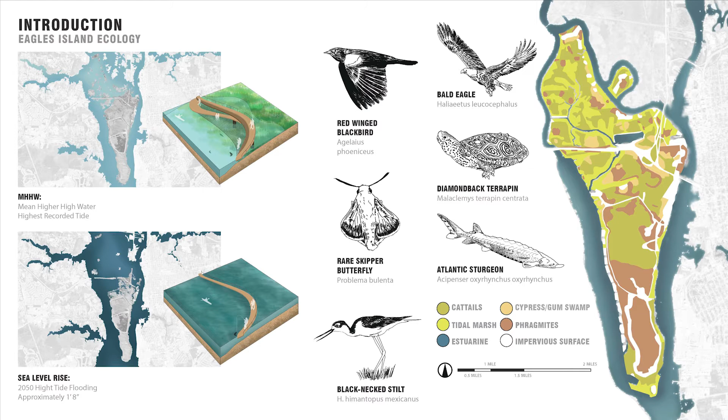Another part of our research looked at how to design for flooding and sea level rise. Because Eagles Island is home to a biodiverse flora and fauna, it serves as a wildlife haven and must be designed sensitively. Our concept for the design is connection as placemaking.

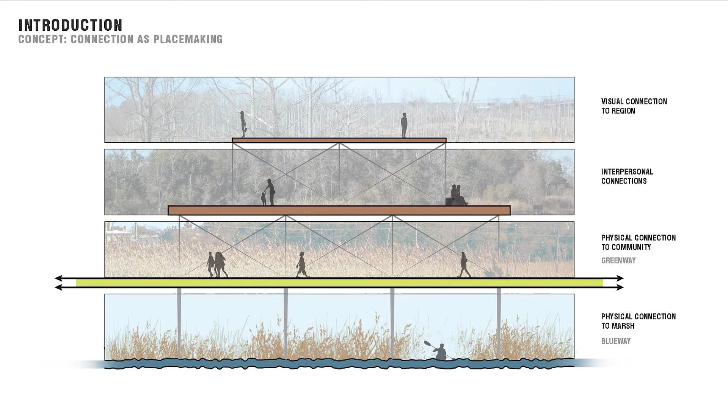By connecting communities and individuals to the natural world and to each other, Eagles Island becomes a place of recreation and education while promoting nature conservation. The design uses pedestrian bridges and blueway trails to directly connect to the surrounding communities.

Based on our analysis of sea level rise, we concentrated programming on the east side of the park. This Edge Park will integrate into the Battleship Park plan. In Edge Park, the Brew Garden connects to the social life of downtown Wilmington via pedestrian bridge.

Visitors to Eagles Island can explore the rest of the park on the bicycle and pedestrian trails or with a kayak on the Blueway loops.

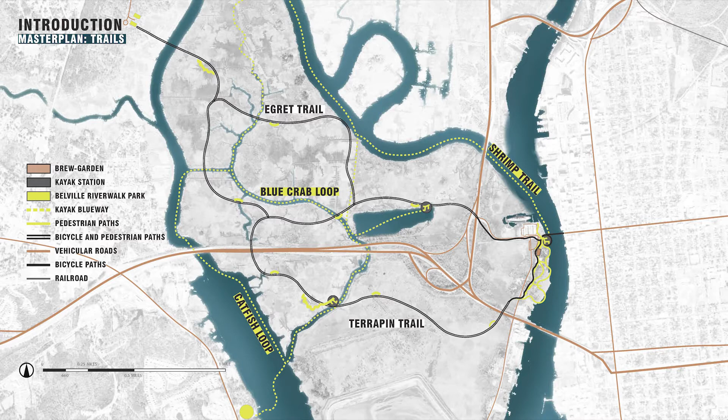The park will be built in phases, starting with the core elements of Edge Park and the major Blueway and Greenway trails, then moving to the second phase, which adds a connection to Belville's Riverwalk Park. The final phase will connect with the proposed Gullah Geechee Heritage Center.

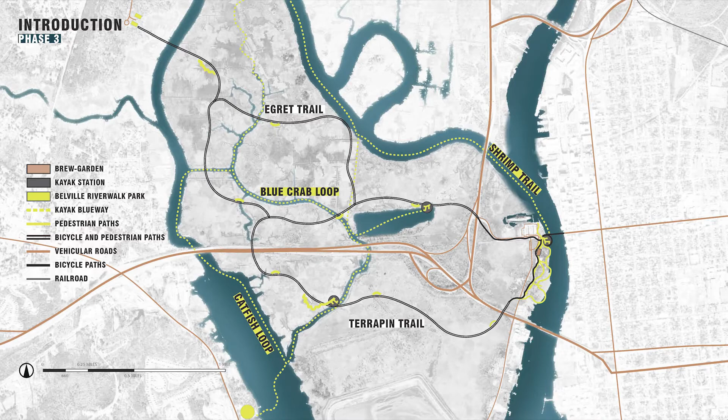First, let's look at the boardwalk and wayfinding design. Because Eagles Island is a marsh, it is most accessible by boardwalk. The design of egret and terrapin trails account for both cyclists and pedestrians, so all can enjoy the island.

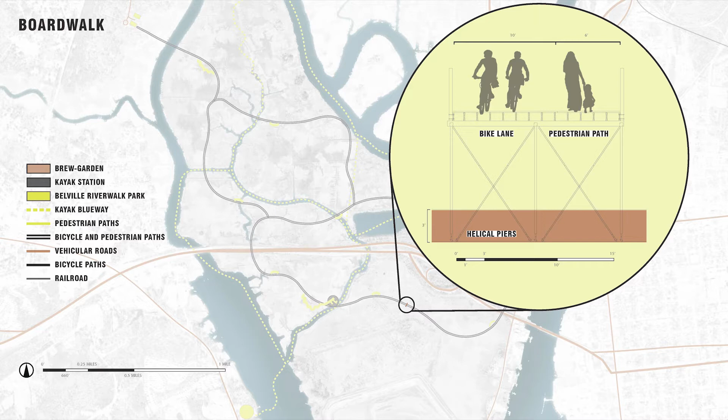The helical piers that support the boardwalk minimize ecological disturbance. Along the 7 miles of trails to walk or bike, there are areas throughout to rest and enjoy Eagles Island. Each marsh overlook has space to park your bike and a repair station if you happen to get a flat.

The pedestrian path pulls a little away from the bike path and slightly lowers into the marsh with ADA accessible ramps. A spacious seating area offers a good place to eat your lunch and watch the birds. Walking closer to the edge, educational signs will teach you about the wildlife that you are seeing.

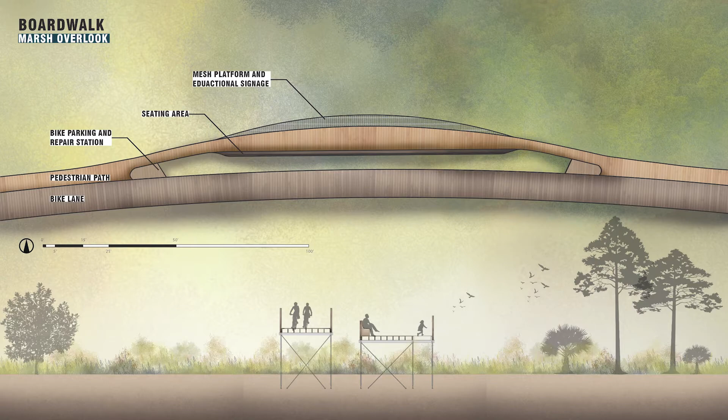At the edge, the wooden boardwalk changes to a mesh, providing a closer connection to the plants and animals of Eagles Island. The physical separation from the main path shows users that this is a place to slow down and soak in the natural beauty of Eagles Island.

While the marsh overlooks show visitors a vista of Eagles Island, there are some areas along the boardwalk that deserve an even closer look to understand their significance.

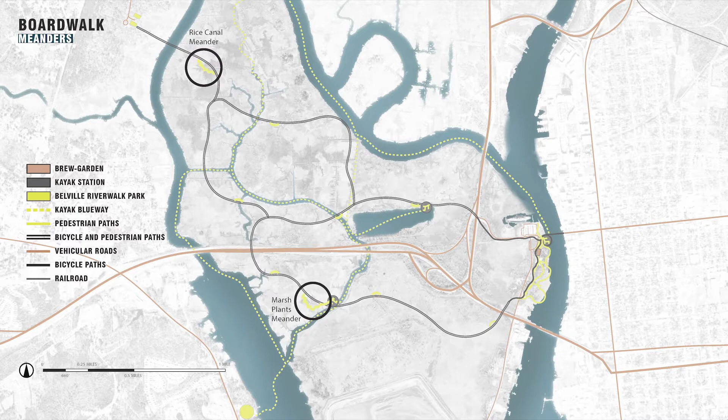These meandering walks are located on the western side of the island to connect with the residents of Belville and Navassa. The marsh plants meander is connected to a kayak station, and the Rice Canal meander is only a short walk from the Gullah Geechee Heritage Center.

These marsh meanders fully break away from the main paths. The winding path guides you to connect with your surroundings and learn about the history of Eagles Island.

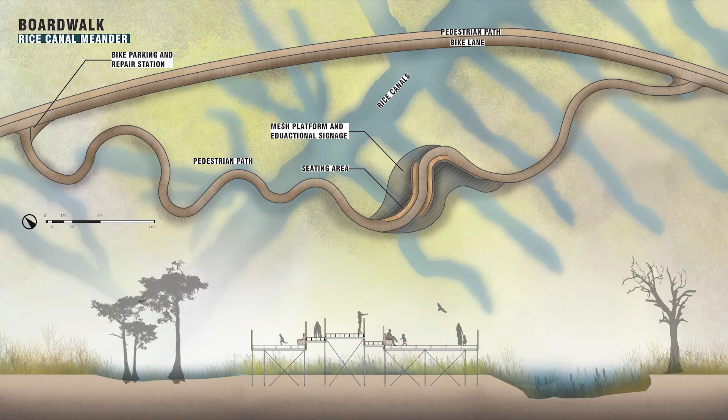The Rice Canal meander allows you to stroll over old canals. These were once used by enslaved Gullah Geechee people to grow rice. The canals that crisscross Eagles Island serve as a visible history of that time.

The marsh plants meander is further south and lets you walk and learn about the ecology of Eagles Island and how humans have impacted it.

This area details the habitats present on Eagles Island, from the cypress gum swamp, tidal freshwater marsh, and stands of cattails. But it also includes information on invasive phragmite stands and the areas of dredge spoil.

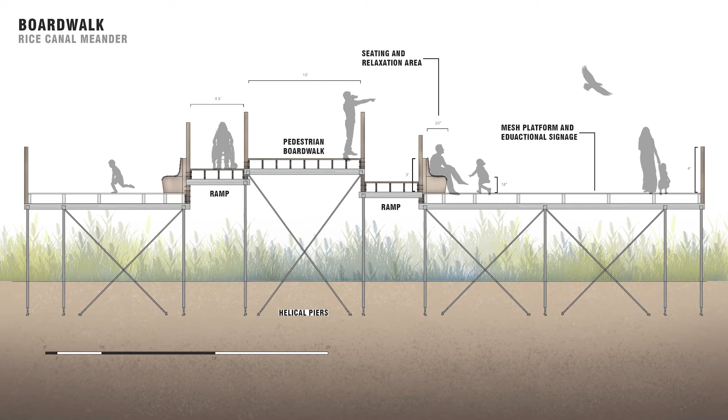The entire southern portion of the island consists of material that was dredged from the surrounding waterways to make the rivers navigable for large vessels.

To help visitors navigate the site, I designed a system of signage standards for wayfinding. Because the focus of the park is connecting people to Eagles Island, the signs share a consistent form that is distinct from the signs in the surrounding communities.

This will help visitors know that they are on Eagles Island. The materials of wood and Corten steel speak to the historical and current industry of the area, and also fit with the materials used for the bridge, brew garden, and kayak stations.

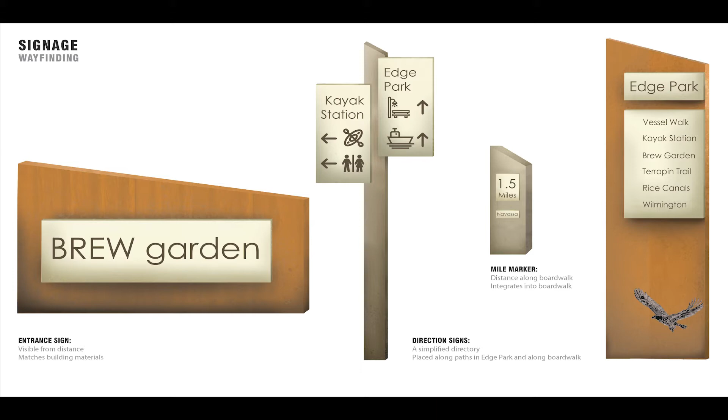These wayfinding signs are repeated at different scales across Eagles Island Nature Park. The trail maps and mile markers also help orient visitors on Terrapin and Egret trails, and the warning signs and trail markers help ensure that Blueway Trail users stay safe.

The signage also serves to connect community members to Eagles Island through education and citizen science outreach. Visitors can use their phone to access apps like iNaturalist and eBird to record observations. Visitors can also help record how the shoreline changes and provide valuable insight to the local scientific community.

The signage system sets Eagles Island Park up for success, since visitors will easily understand how to navigate the park and connect with the history and ecology of the site, while they connect with each other and with the local community.

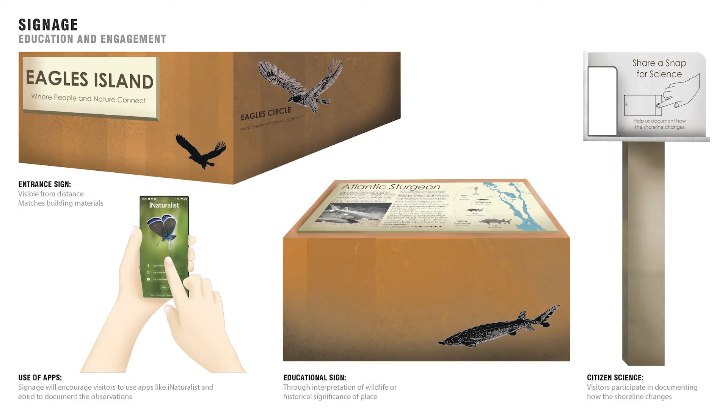So now moving from the larger master plan and wayfinding to Edge Park, where visitors can discover local treasures while being immersed in the natural environment, with a goal to explore, connect, and restore.

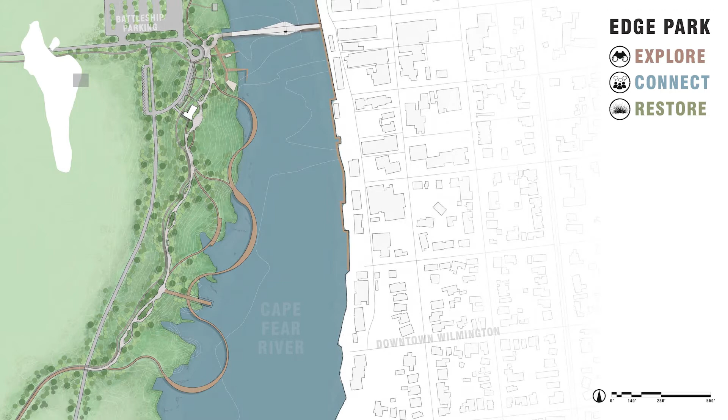My site analysis revealed the lack of public parks and green spaces in downtown Wilmington. There's a need for an engaging green space, and the best location is across from Wilmington's Riverwalk and adjacent to the frequently visited Battleship. Edge Park would nearly double the amount of public green space in downtown Wilmington.

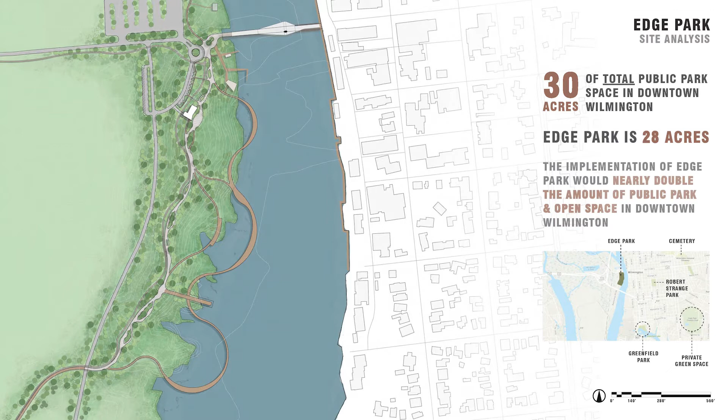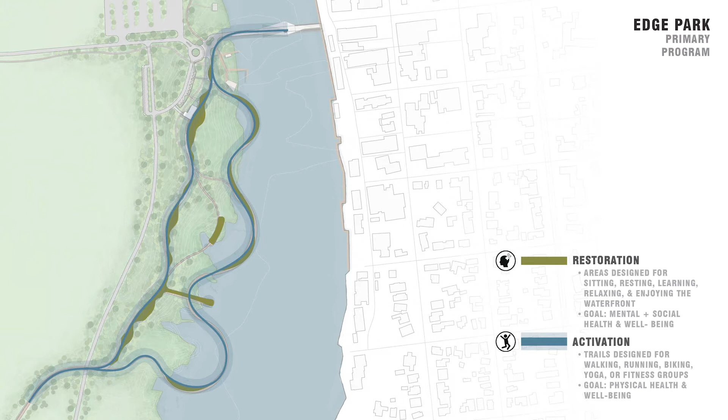Edge Park's primary program consists of restoration, or places to rest, learn, and relax, with a goal of improved mental and social health and well-being, and also activation, with areas for walking, running, biking, or yoga, aiming to improve health and well-being.

There are three primary elements of Edge Park: the Vessel Walk, highlighting living shoreline and education, Upper Path, designed for socialization and recreation, and View Platforms, highlighting visual connections and restoration.

Active and restorative programs are scattered throughout the park, with supporting facilities such as seating, lighting, shade structures, restrooms, and parking. There are many activities and unique elements to discover, like exploring the sunken vessel and wharf remains via kayak.

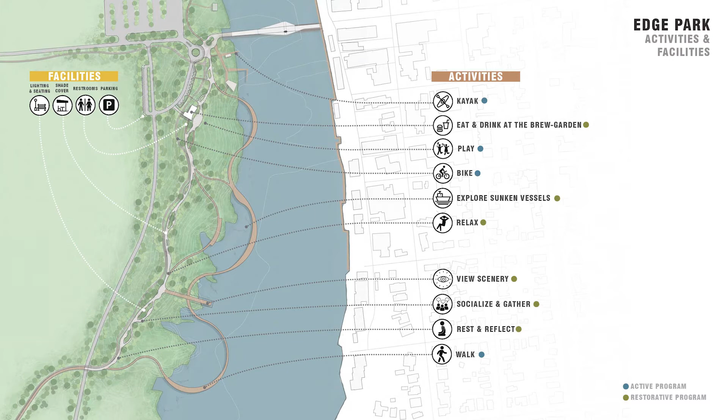Or walking along the curvy Vessel Walk designed for users to view vessels from all angles. There are areas to gather and relax with views overlooking the Cape Fear River. A pedestrian bridge connection from Wilmington's Riverwalk offers an easy access to Edge Park.

The 14-foot wide Upper Path is designed for low travel speeds. The 9-foot wide Boardwalk or Vessel Walk is for pedestrians, and the 8-foot wide Bike Path is for higher travel speeds.

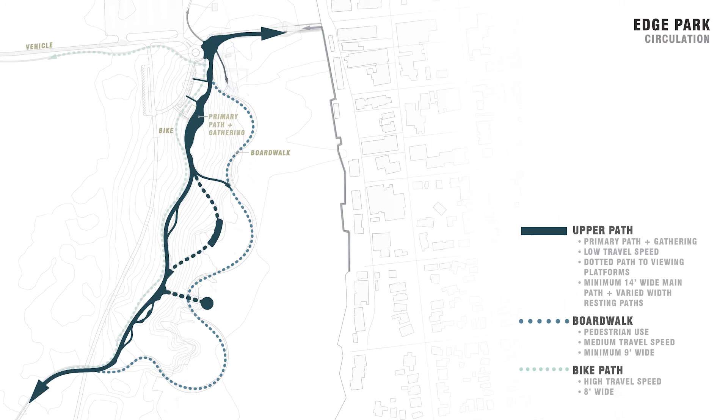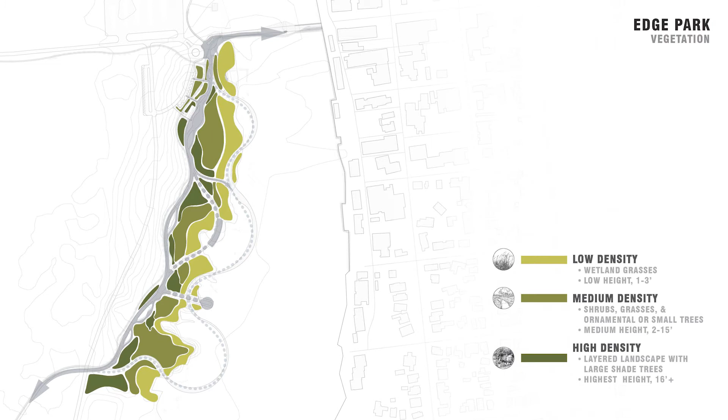The vegetation selection considers plants native to Eagles Island. Low density includes wetland grasses 1 to 3 feet in height. Shrubs, grasses, and small trees make up the medium density, with height varying between 2 feet and 15 feet, and high density is a multi-layered landscape with large shade trees larger than 16 feet tall.

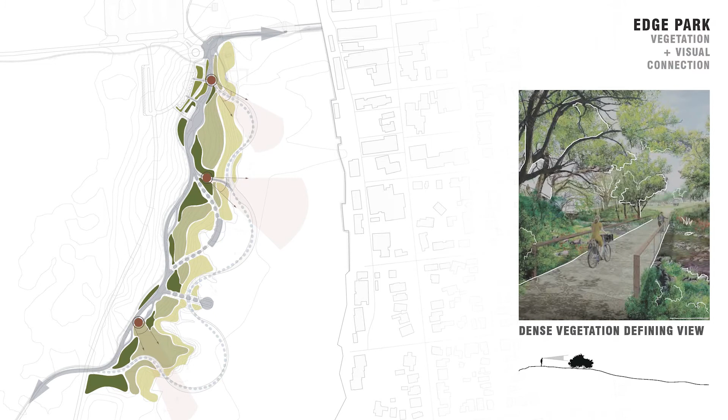Vegetation also guides views and experience of the park visitor. Sections of dense vegetation are scattered along the Upper Path and define the pedestrian's view, allowing them to see glimpses of where they're going next, while also providing shade and vegetative interest.

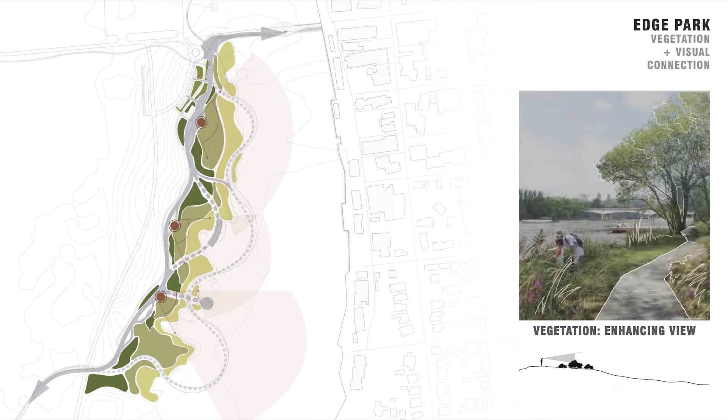Vegetation also enhances the view, creating prospect and refuge. The wetland ecology, boardwalk, and view platforms also allow for unobstructed views.

The Edge Park plan considers climate changes and sea level rise. A living shoreline is designed with biophilic design in mind. 2-foot sea level rise is expected by 2070, 3 feet by 2095, and 4 feet by 2120. With a living shoreline and restoration of wetland ecosystems, Edge Park is designed to flourish for many generations.

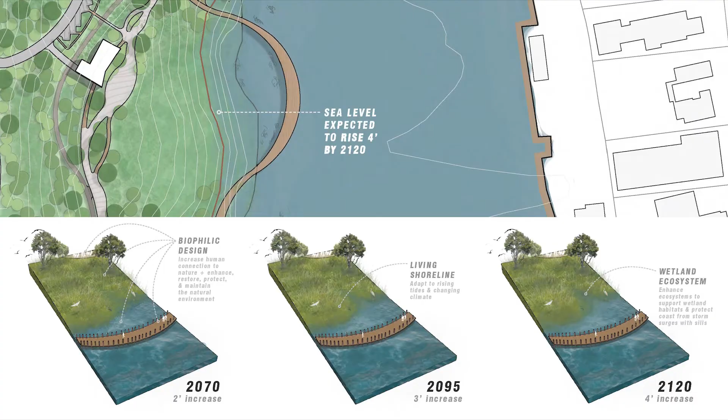I'll walk through the three primary elements, starting with the Vessel Walk. The unique ecology of Eagles Island is enhanced and restored through a living shoreline. A minimally invasive boardwalk is 5 feet above the current sea level, allowing for rising tides and sea levels.

The shoreline is an excellent educational opportunity. Schools and classes can learn about local ecology and climate changes, or university students can investigate the shoreline.

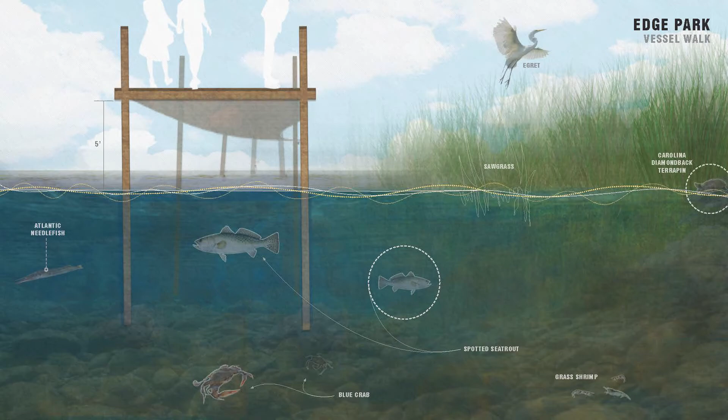The yellow ribbon light art installation catches your eye if you're on Wilmington's Riverwalk or walking along the Upper Path of Edge Park, inviting you down to the water. Lighting is located along the entire Vessel Walk, but there are 3 highlighted sections where the ribbon gradually grows in height. This allows for an interesting pedestrian experience.

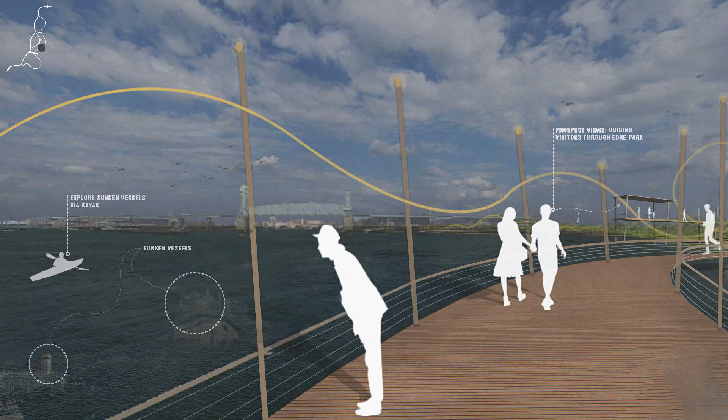Visitors can view the historic Cape Fear Memorial Bridge, explore sunken vessels, gather in seating areas, and stroll along the half-mile boardwalk. Visual connections to Wilmington's existing Riverwalk and adjacent amenities guide visitors through the park.

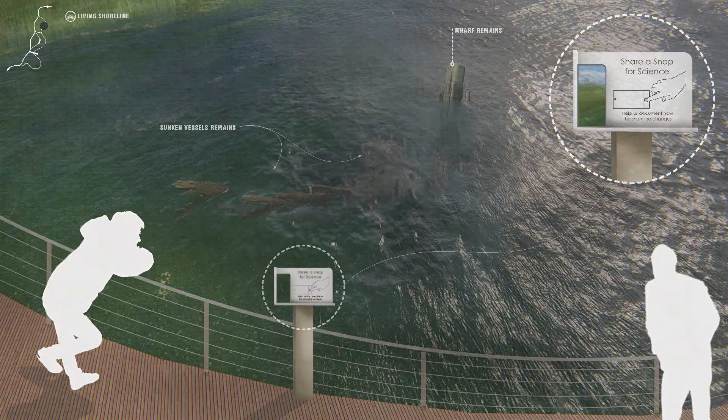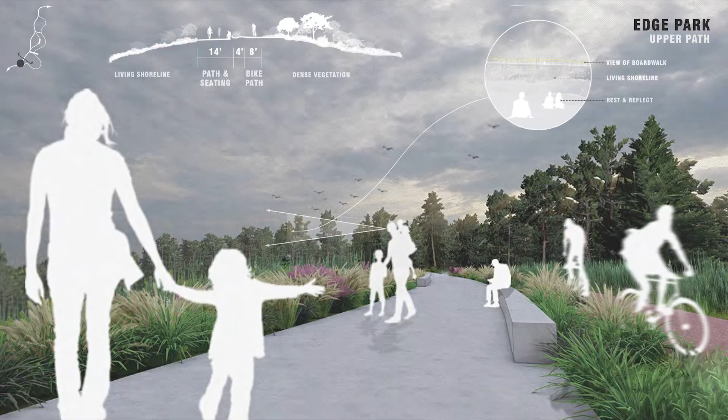Educational signs allow visitors to learn more about the living shoreline and climate changes. A few interactive shoreline exhibits offer a fun way to engage with and contribute to ecological documentation. The upper path is a walking, running, biking, and gathering space.

It's higher in elevation, allowing visitors to view the boardwalk and waterfront. With seating and shade structures, this is a great spot to relax and spend time with friends and family.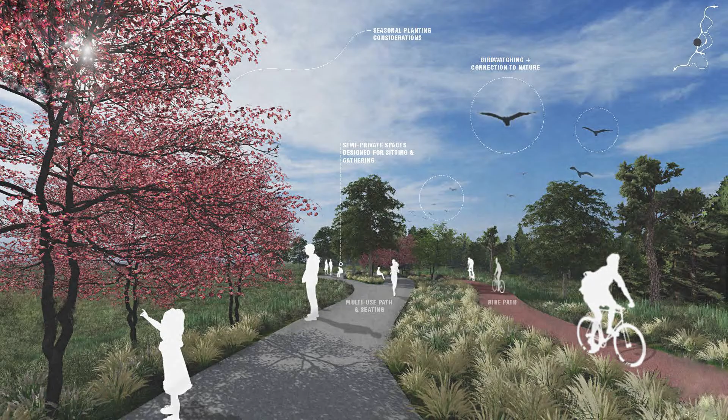While the vessel walk allows visitors to directly connect with the waterfront, this upper path connects visitors to nature and offers opportunities for bird watching. Additionally, the upper path connects visitors directly to the Battleship, Wilmington's Market Street, and the rest of Eagles Island boardwalk

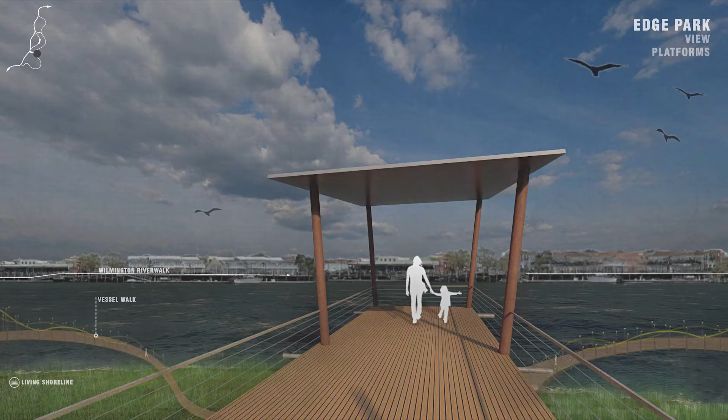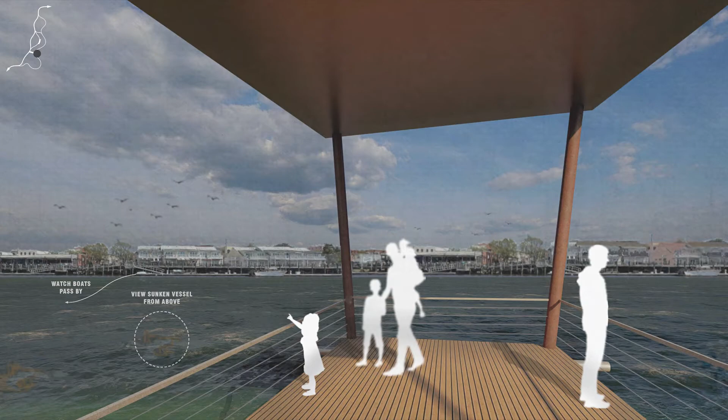and interaction zones. The two large view platforms are a must-visit attraction at Edge Park. Visitors can venture out to the edge of the water 17 feet above the Cape Fear for a 360-degree view of Edge Park and downtown Wilmington. Visitors can watch boats pass by, see sunken vessels from above, gather under shade structures, and photograph the sweeping views. Edge Park is a park for all ages and abilities.

Everyone can explore, learn, discover, and experience something new during each visit. Wilmington's Riverwalk connects visitors and residents alike to the Cape Fear River with ease. Visitors dine and shop along the Riverwalk, viewing the natural environment of Eagles Island across the river.

Right now, only views of the island are currently allowed, with no easy accessible route to the island by foot or by bike. With a new pedestrian and cycling bridge, visitors and residents can simply walk about a tenth of a mile across the Cape Fear from Market Street at the Riverwalk to Eagles Island.

The pedestrian bridge invites cyclists and pedestrians to take their time crossing the river, with active spaces along the path for gathering and relaxing. The path is lined with vegetation reminiscent of the natural elements found on Eagles Island.

The Corten steel reaches towards the sky in both directions, marking the two sides of the river the bridge connects under one common space. Clad in polycarbonate, the butterfly volume is translucent and provides overhead protection from the elements, but allows for ample sunlight. The bridge swivels out of the way to make room for large boats sailing through Wilmington,

while still being accessible to the public on the downtown side. Spaces to gather on the swiveled bridge include a stepped seating area as well as many benches underneath shade throughout.

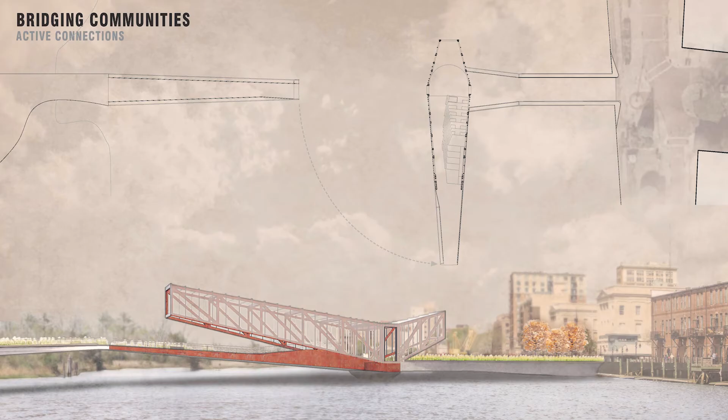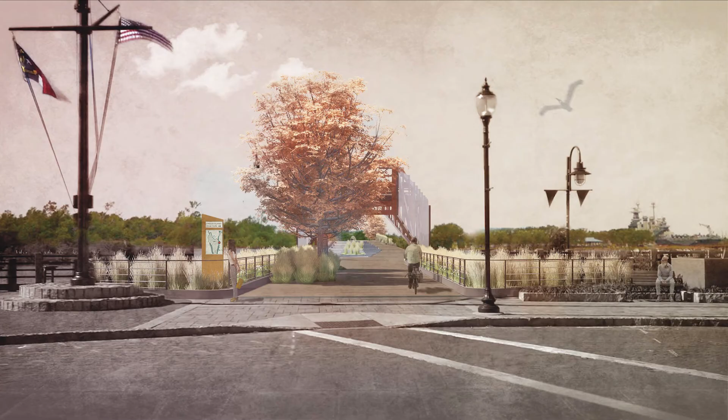An elevation describes the form's expression of the swivel using a truss that helps cantilever the bridge from one common swivel point. From the busy Market Street seen here, visitors can seamlessly walk or bike straight across to Eagles Island.

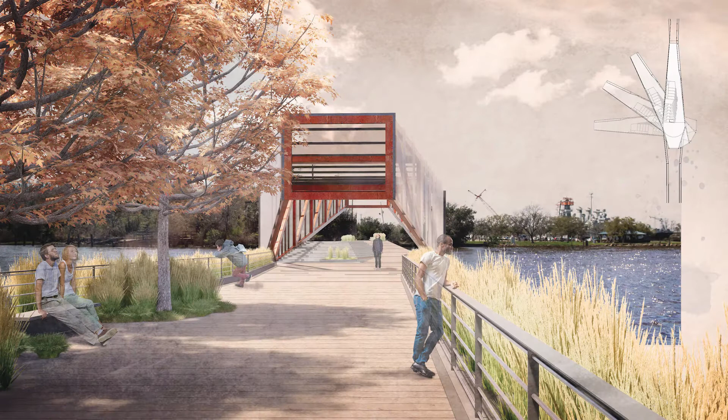This provides a pedestrian connection unseen anywhere on Eagles Island that puts people first, not cars. On the stationary portion of the bridge closest to the Riverwalk, the swivel is seen here.

Rotating at a leisurely speed of 1/2 inch per second, visitors can walk freely from the stationary side to the rotating side. While fully rotated, the bridge still acts as a gathering space, reaching above the water to face the Cape Fear Memorial Bridge. This gathering space provides opportunity for relaxation on the water, with views of both Eagles Island

and downtown Wilmington. Placemaking is on display here through the central path that connects two sides of the river, while also creating a destination of the bridge, using the seating area.

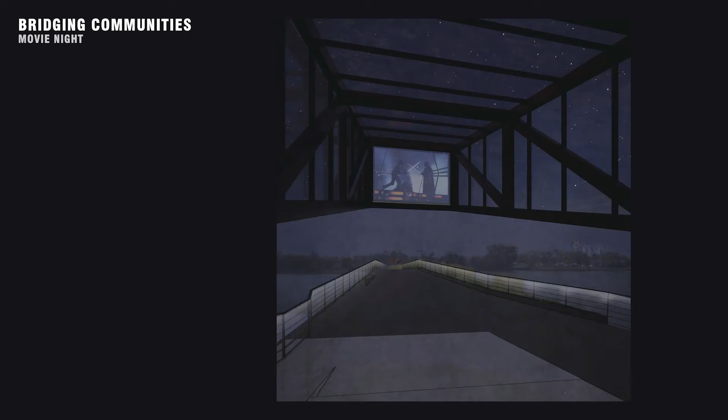At night, the cantilevered truss provides the opportunity to host movie-watching events on the bridge, right over the water and underneath the stars. Visitors can sit and relax on the terraced seating area while a movie can be shown above.

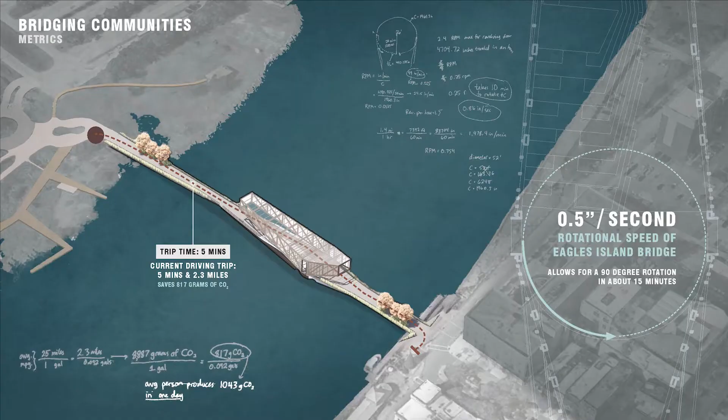Since the bridge swivels at a speed of about 1/2 inch per second, it allows for a 90-degree rotation in only 15 minutes. This slow speed makes it easy to walk freely between swiveling portions and stationary portions, while also maintaining efficiency for boats passing by.

Currently, it is a 5-minute drive of 2.3 miles from the Riverwalk at Market Street to where Edge Park will be located, crossing the Cape Fear Memorial Bridge to the south.

Instead, this bridge will allow visitors to take a 5-minute stroll across the 600-foot bridge to get to Edge Park, the Brew Garden, and the kayak station.

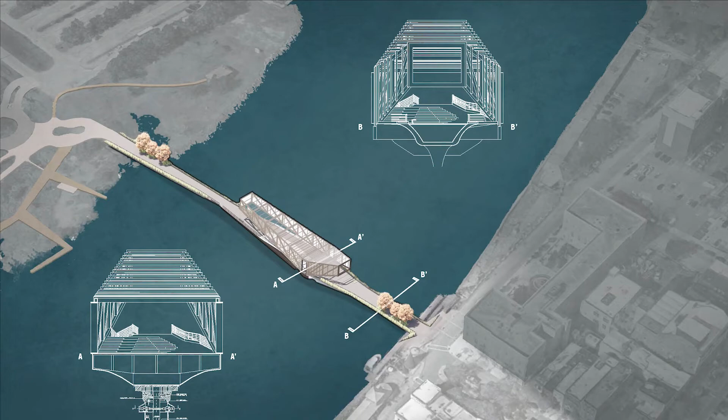Using the natural environment, technology to swivel a cantilevering bridge, and engineered trusses, this bridge to Eagles Island provides connection and a destination. From the pedestrian bridge, visitors can walk to the kayak and viewing station.

Following the master plan, I mapped out the site and determined several points for the structure to be placed, including 3 new blue trails, giving the park at least 9.5 miles of rowing.

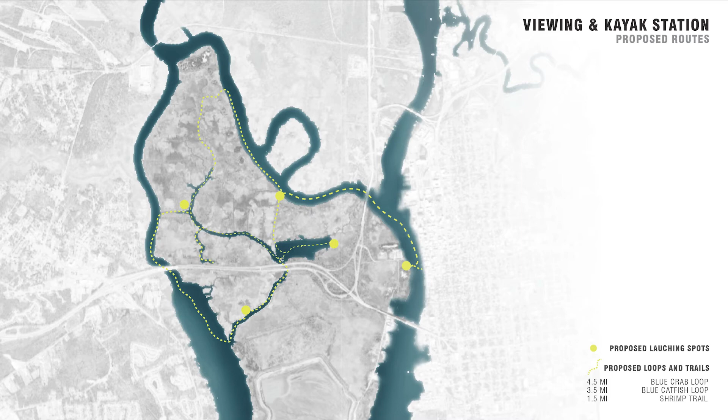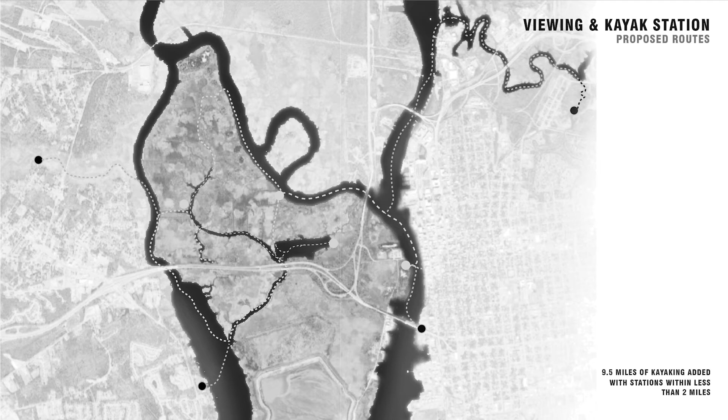This progressed to an opportunity of 5 to 7 hours of attraction, translating to 140 to 200 calories per hour, allowing the visitor to explore and exercise.

The concept of this project aims to resemble the marsh grasses in Eagles Island, designed to be lightweight for the scenery and merge into them, using long, round steel columns that overpass the roof and continue to the sky, holding volumes, platforms, and decks.

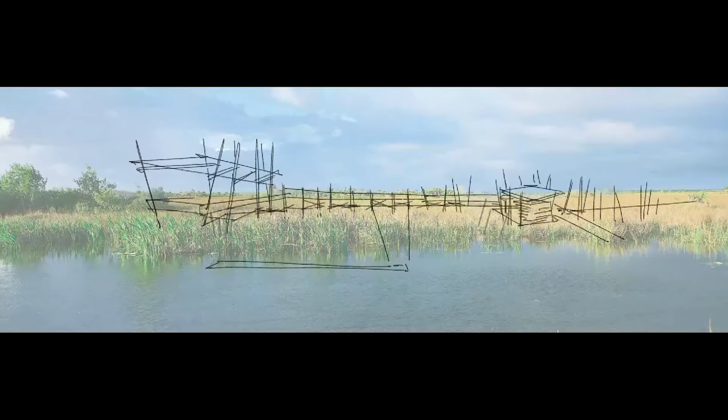This structure sits on the waterfront looking towards the city of Wilmington, close to the pedestrian bridge and start, where the welcoming plaza is, surrounded by the Edge Park. It is close to parking spots and access to loading area for kayaks.

The intervention acts as a central span with 3 different branches reinforced by the floor design orientation, one serving a kayak station, one for a boat deck, and another for the viewing platform at the end, adding square feet of walkable surface and shadow protection at this point.

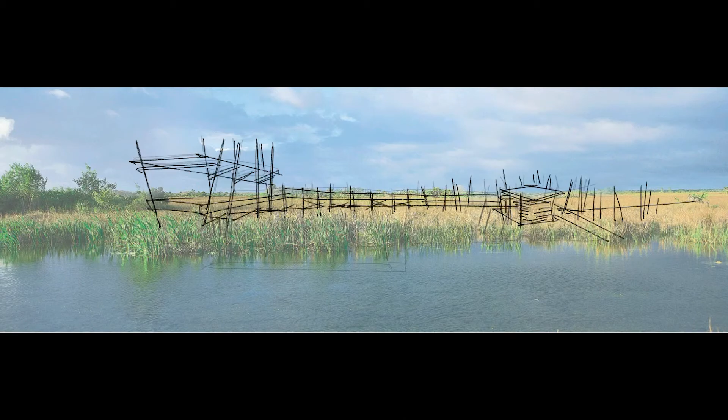The kayak station intends to provide accommodation, storage, and service to the paddlers while in the park.

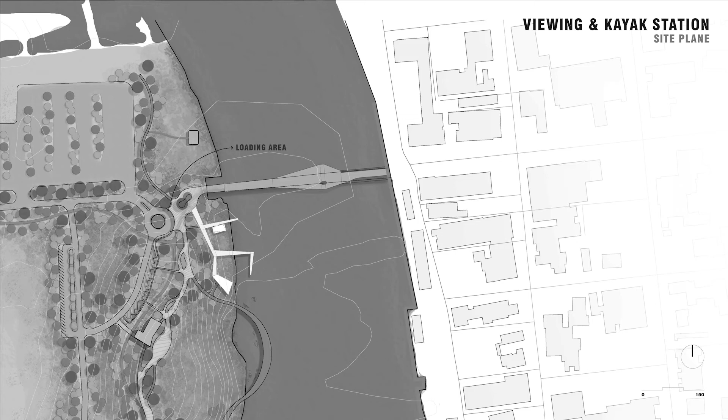Thinking about the resilience and regeneration of the structure, it was designed to have PV panels for solar energy collection, a rainwater harvesting system, compost toilet, sunshade protection for the lounge area, which is elevated to allow water and mud to flood in case of flooding, and great water management.

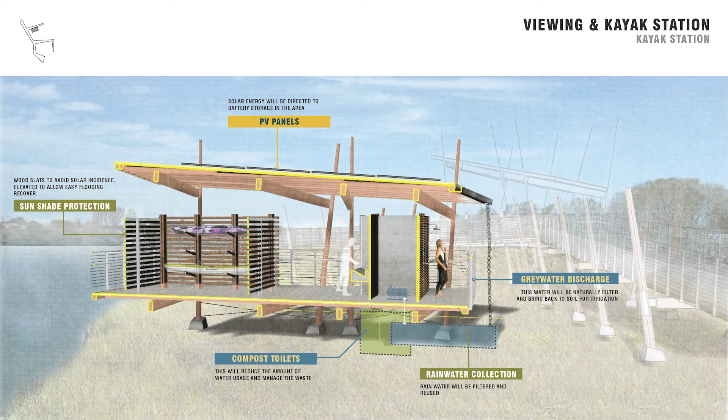These spots can serve 4 to 6 kayakers at the same time. It is located less than 120 feet away from the loading area.

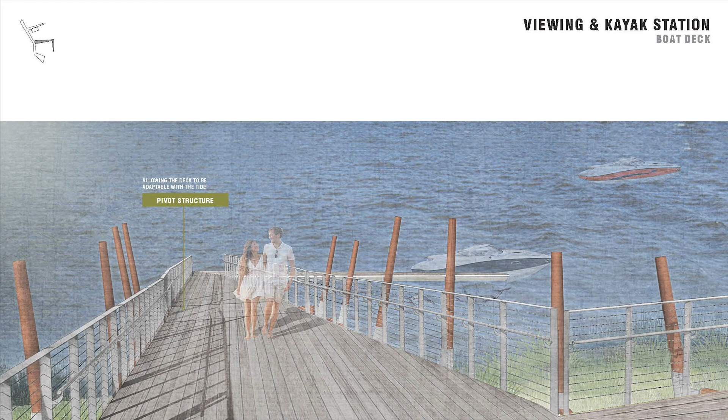For the boat deck, as it is getting closer to the water, it has a pivot structure underneath, allowing it to be adaptable with the tide, supported by pontoons to help the buoyancy of the deck. This deck could also be extendable in the future and could manage at least 6 boats depending on their dimension and how they position to park.

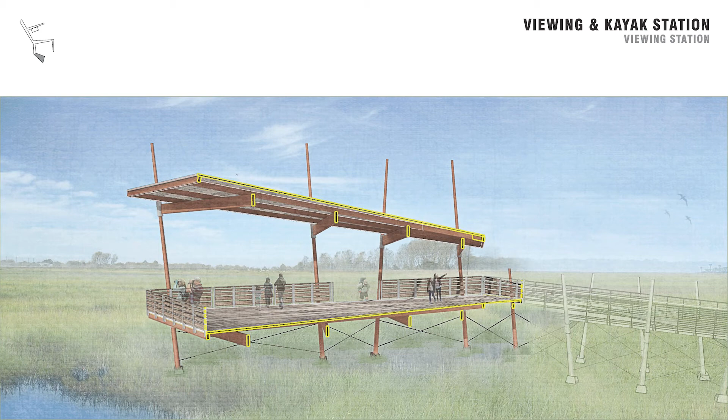The viewing platform reveals the structure behind this intervention, with frames using subtle bolted connections between columns and beams for easy installation, connecting to the Edge Park. Design strategies deal with wind force, like separation between rails and permeability on the deck, where part of it could be alternated with industrial grating to allow wind flow. The roof could also be separated for the same purpose.

The material chosen for this project was primarily Corten steel, which gives long-term cost savings. Deck and roof are supported by a steel frame that resembles the surrounding nature.

These frames are angled to avoid the pulling force taking the structure out of the ground in case of a hurricane. They're composed of columns that rise from the concrete foundation deep enough, with a decreasing section as they rise up, allowing the connection to adjust at the required elevation and prevent slipping downwards.

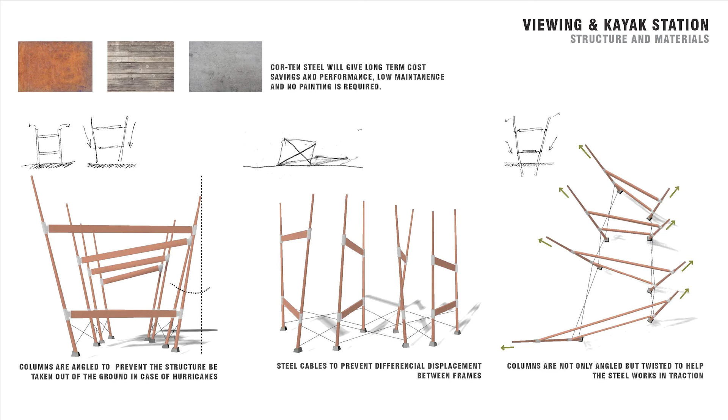To provide stability between the frames, they are connected with steel cables to prevent differential displacement between them. The columns are not only angled but also twisted to help the steel work in traction.

The connections are expected to be prefabricated members that can be bolted to the columns as well as the beams, reducing construction time and promoting easy installation. Having a bolted structure also provides advantages for future repairs and maintenance.

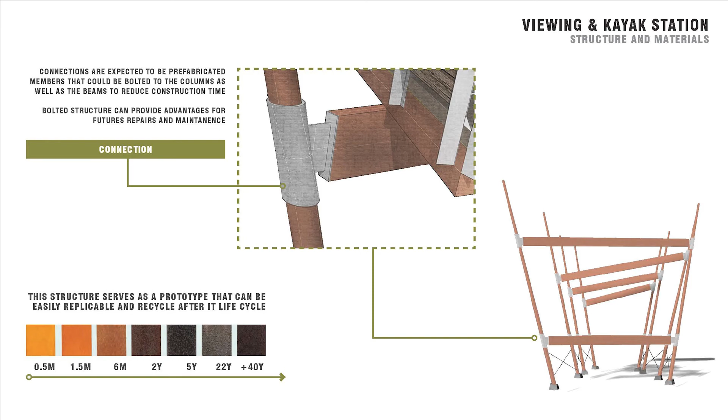Each of the parts can be easily repaired without the usage of welding, minimizing exposure to pollution agents like argon. This serves as a prototype and could also be recycled after its life cycle.

The kayak ramp will also be adaptable according to tide conditions. Wayfinding will also be added to the path to allow users to flow smoothly between the different areas offered on this master plan and its interventions.

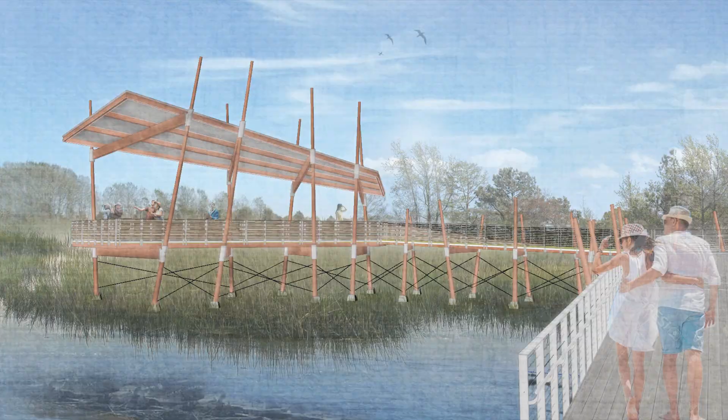This structure could be a landmark in the landscape, given the particularity of its composition. It is known that people in Wilmington enjoy going on their boats everywhere, so this is a good chance to catch that public and give them the opportunity to land directly on the island.

Part of the solar energy will be used to illuminate the structure with soft lights on top of the columns connected to a photocell, enhancing the silhouette from a distance. Considering the projected sea level rise of 3 feet by 2095, the structure will still be standing and continue working properly.

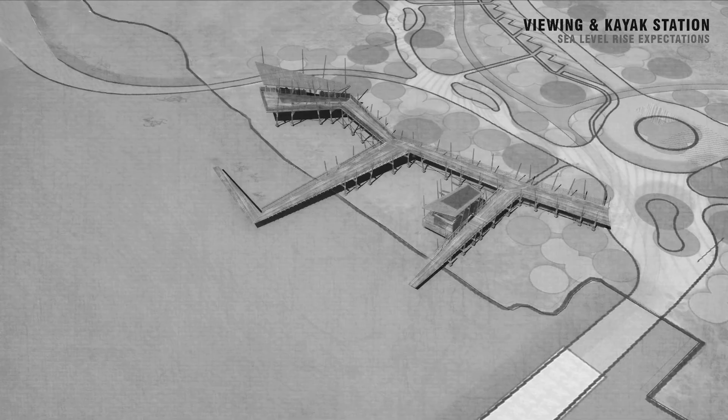After a short walk from Maria's structures, you will come across the Brew Garden.

From a few trips to Wilmington, as well as research on the area, we became familiar with the established interest and industry relating to bars, breweries, and beer festivals. We wanted to create a seamless connection from Wilmington and surrounding communities to Eagles Island by recognizing what's there and what works well, but also what we could do better.

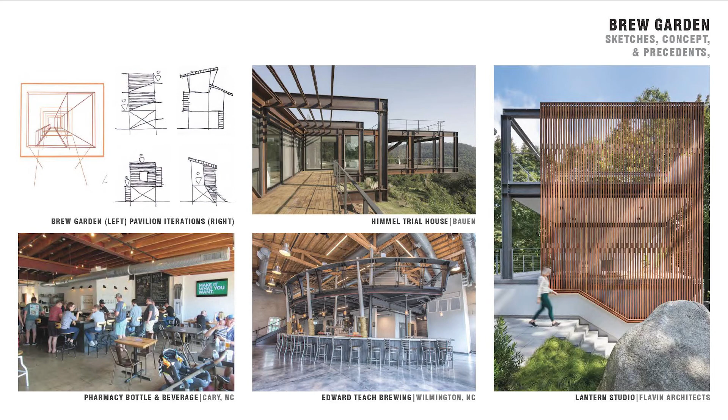I began by researching precedents of small-scale, family-friendly bars and breweries, as well as coffee shops. The driving concept was a flood-protected, open-air structure that did not disrupt nature but rather embraced it. Within the structure, I wanted to create an open space that directed the eye at nature while allowing for its own program to partake within—in this case, a coffee shop by day, bar by night.

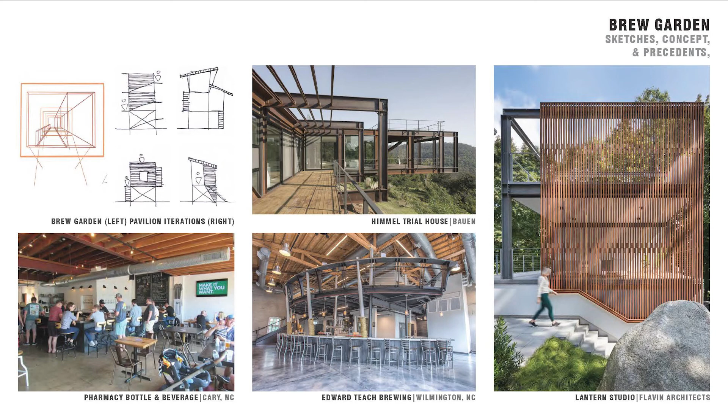I then turned to sketching planes within the structure and thinking about the levels and perspectives of viewing that connect with the rest of our concept. In some sketches, you can see iterations of the proposed modular pavilions that create different experiences each time.

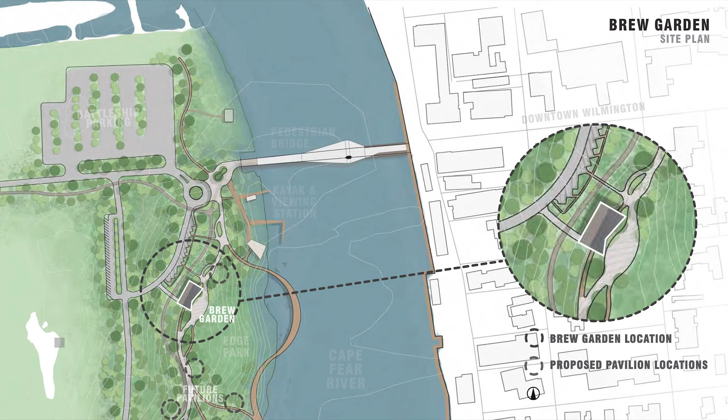The Brew Garden is strategically placed in close proximity to the pedestrian bridge and boating structures. It is oriented towards the Cape Fear River and Memorial Bridge. Pavilions are proposed to be implemented along the path in the Edge Park as a part of the journey. They will derive from the Brew Garden in a variety of modular forms.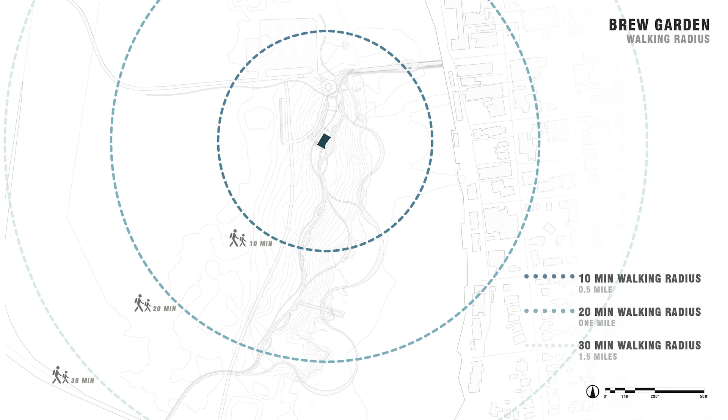Diagrammed here, you can see the walking radius from the Brew Garden to other locations on the site. The Brew Garden is just a 5 to 10 minute walk away from the kayak stations and pedestrian bridge, while the rest of the Edge Park is within a 20 to 25 minute walk. The Wilmington Riverwalk is a short 15-minute walk away, with further access to the rest of downtown Wilmington and its parking. Along the Edge Park, you will approach the seamless connection between the boardwalk and the Brew Garden.

I wanted to use an open structure to create the sense of space and feeling of entering a structure without using walls and closing it off.

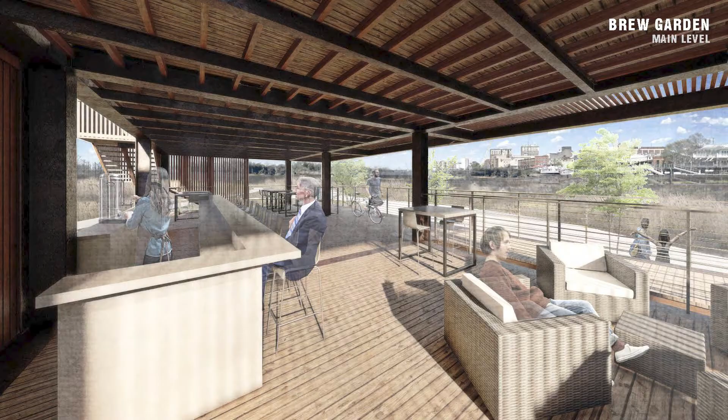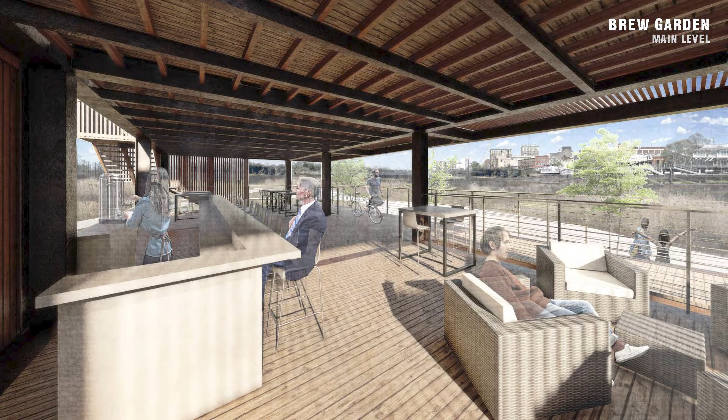Just off the boardwalk is an airy, covered, patio-like space for public interaction, retail, and events. I wanted to create a family-friendly space that could not only be used for coffee and beer, but also provide a space that could be used for other events. By keeping an open floor plan with a simple bar and back of house, the structure permits for this to happen, allowing the idea of a rotating program.

Ascending up the structure is a shaded terrace for rest, drinking, and sightseeing. From 30 feet above the ground plane, the public have a different vantage point of the environment, from a better view of the bridge to birdwatching.

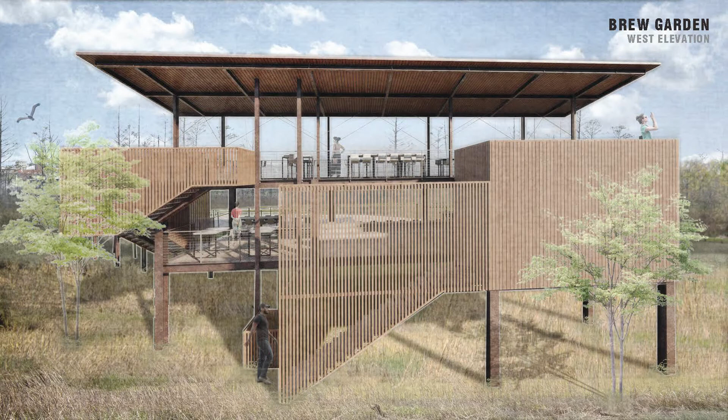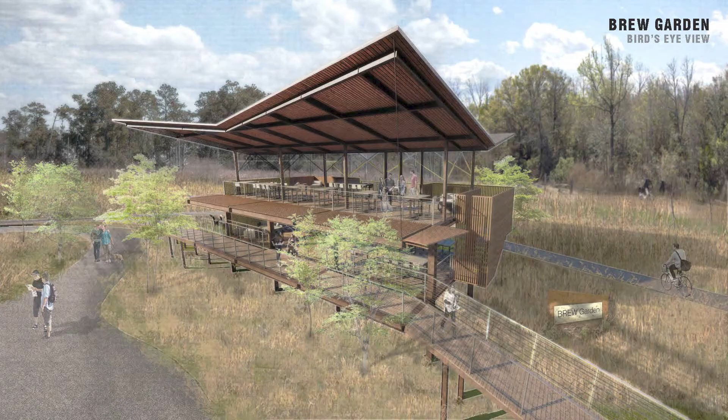The structure is wrapped with wood slats expressing the stairs, rails, and walls. The vertical slats relate to the surrounding environment while also providing shade. They also conceal the private programs by gathering closer for a more opaque, enclosed space for the back of house and bathroom spaces. The structure's use of Corten steel speaks to the ships and industrialization of the site, while

the use of wood allows for an organic and natural feel connecting to nature. The sharp angles and openings in the structure's roof and cladding direct the eye to different areas of the site while connecting to other structures like the viewing and kayak stations.

The Brew Garden is an open and light space constructed with bold materials that supports the likings of the surrounding community and creates a new, intimate connection with Eagles Island. A connection with all aspects of Eagles Island has been of importance as we navigated this project, providing areas to connect with nature, with the area, and with each other.

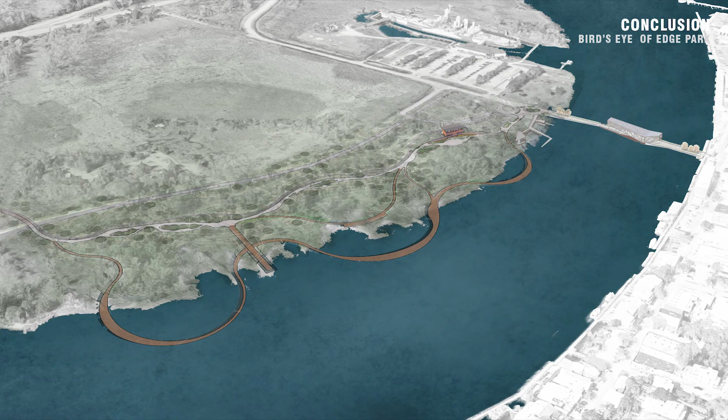By connecting communities to the rich natural environment, Eagles Island becomes a place of recreation and education while promoting nature conservation. The bridge acts as a connector, not only physically, but also symbolically, as Eagles Island has long been disconnected from the urban fabric of downtown Wilmington, right across the river.

Similarly, Edge Park creates a welcoming environment to explore, connect, and restore. The park achieves this through a vessel walk, bike and walking trails, and vegetation that respects the island's unique ecology. The implementation of Edge Park would nearly double the amount of public park and open space in downtown Wilmington.

A central hub within that park is the Brew Garden, an open structure that seamlessly provides places to gather and relax with a brew of your choosing. The garden acts as an addition to the established brewery culture already existing in downtown Wilmington.

Kayak launching and viewing stations provide accommodation, storage, and services to the paddlers throughout the park, connecting with blueway trails in the area and stationing areas of respite throughout the meandering rice canals. Wayfinding through the extensive areas of the park is made accessible through educational signage, increasing both citizen outreach and literacy on the impacts we have on the natural environment.

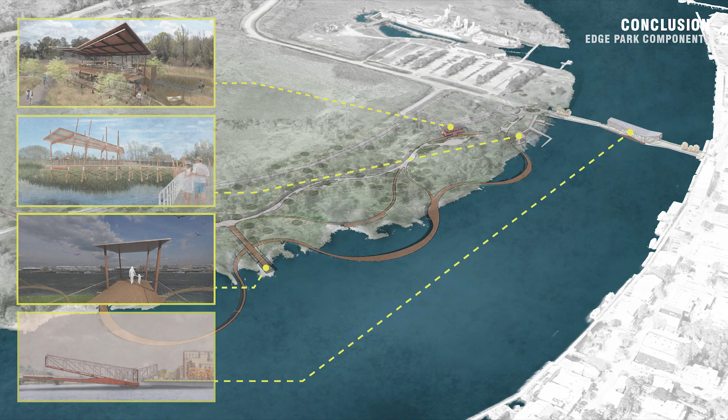At its core, Edge Park in our master plan of Eagles Island simply helps visitors connect to nature and provide opportunities to enjoy the beauty of the area.